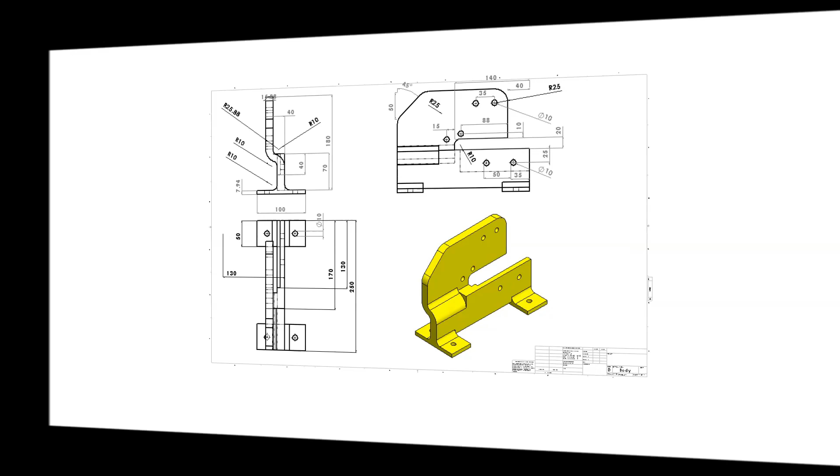Now we will sketch the first part of the guillotine shearing machine, manual shearing machine. Let's start. Choose front plane, sketch, select a line and start to draw from the origin point.

And connect. Now exit. Now we will assign dimension: 15.875, 70 mm distance from top, 180 mm, and the distance from here to this path, choose 40. Select OK. Now select this line.

Shift key, this line and this line, make relation equal. Now these 3 points are equal. Now our geometry is fully defined.

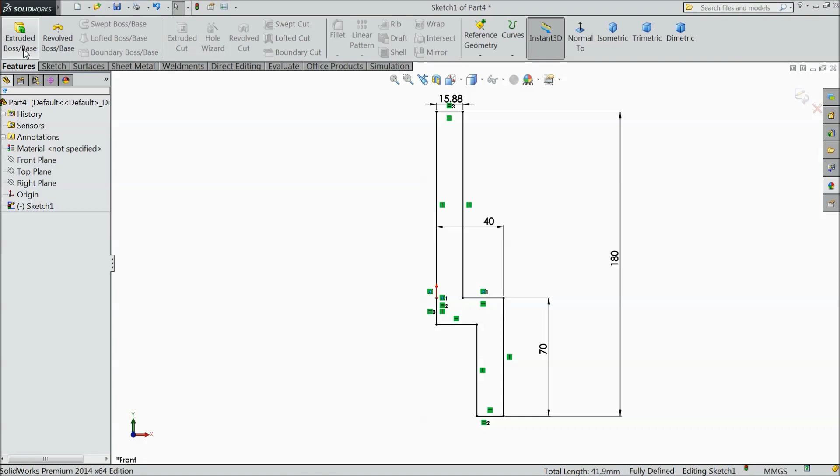Now we will extrude 250 mm. Select OK. Now see, the body is defined.

Now select this back surface, choose sketch. Exit. Select first normal. We want to define some... okay. Now let's select back surface, sketch, normal.

Select corner rectangle, exit, select 100 mm and this one select 7.9375.

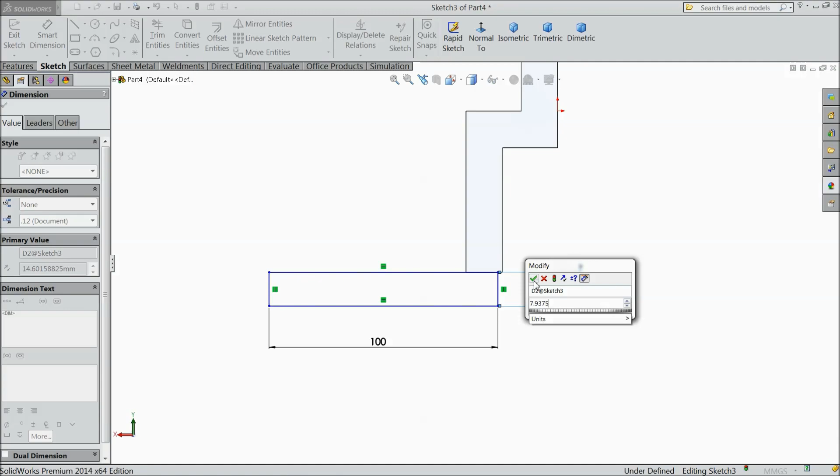Okay. Now select this line and select this line, make relation collinear. Okay. Now drag this here.

Now we want to make this parallel. So just delete this first. Assign one dimension from here to here. Choose smart dimension. Assign any one, 40, like this.

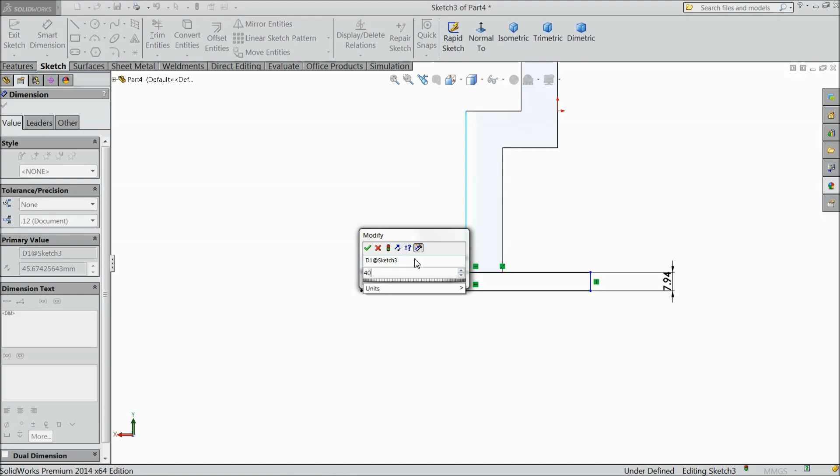Or cancel this line, make it from here to here, then up to here, then up to here. Now exit. Now choose, delete this line, make relation, this line select equal. Now assign 100.

Okay. Select extruded boss, keep reverse direction, 50 mm. Okay.

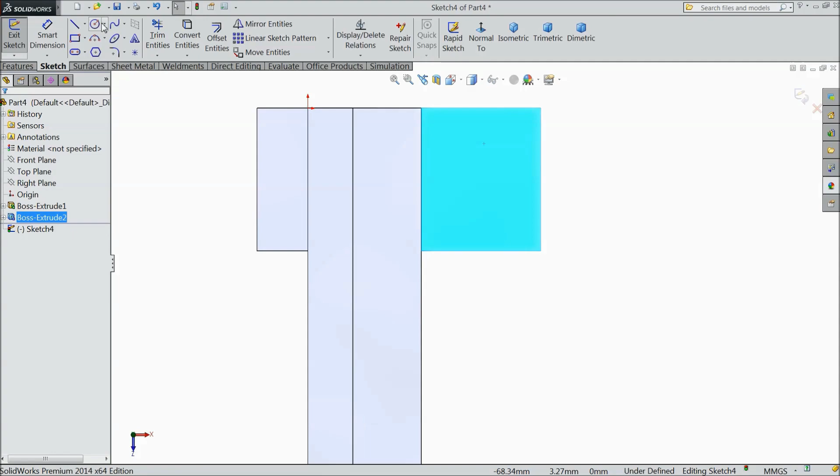Now select this face, sketch, normal, and we want to draw a circle. So first select center line, exit. Now select a circle in center, select 10 mm and select extruded cut, choose through all.

Okay. Now see. Now we want to mirror this hole. So first we have to create a plane in between this line. So just select plane. It will take a few seconds.

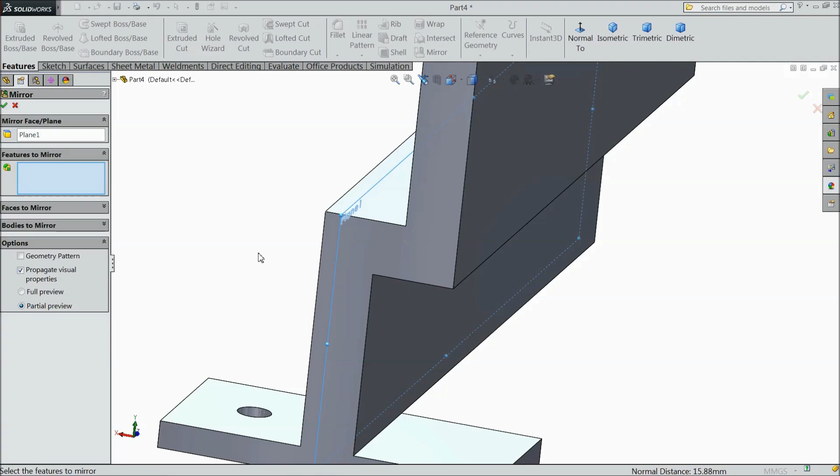Select this side and select this side. Now see, the plane is going to be created in the mid plane center. Choose OK. Select mirror. Select here cutout. See, it is going to mirror.

OK. Now choose fillet. Select 10 mm this side and this side. Choose OK. Now hide this plane.

Now we want to mirror this whole extruded part this side. So let's create a plane in between this. So choose mirror, plane, select this face and select this face. Now see the plane going to be created in mid size. Choose OK. Select mirror.

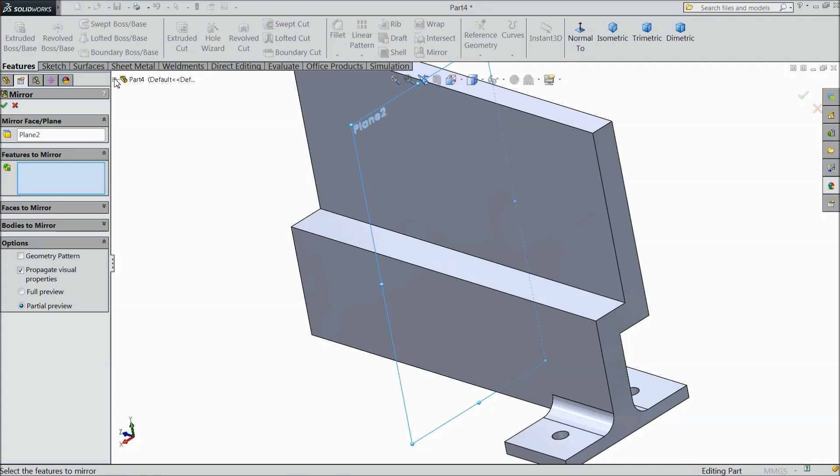Now select those parts we want to mirror: fillet, mirror, cutout, and extruded boss. These are all parts we want to mirror. Choose OK.

Hide this plane. Oh sorry, just hide this plane. OK. Now select this face, sketch normal.

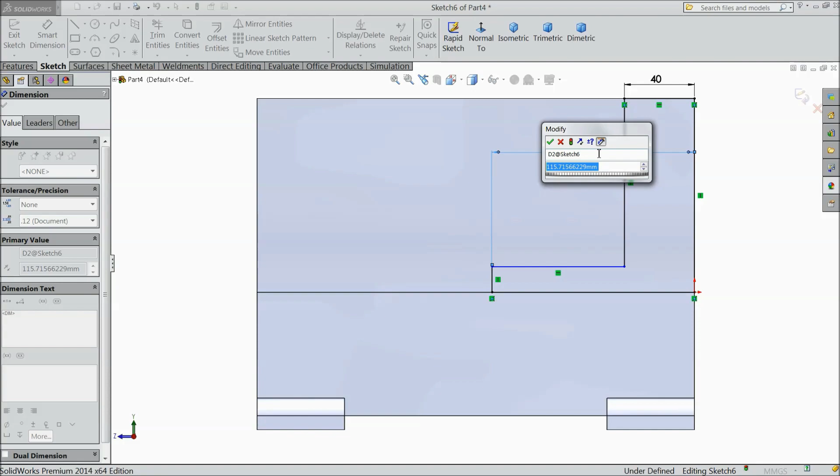Select a line. We want to cut it. Now exit from the line, choose smart dimension: 40 mm and length from here to end 140 mm, and this height 20 mm.

Select extruded cut. Now this portion we want to cut through all. Choose through all. OK.

Now select fillet, choose 25 mm and select this end. OK.

Select this face, sketch normal. Now select line, start from here to this end, up to this end, and connect it. Now exit from the line.

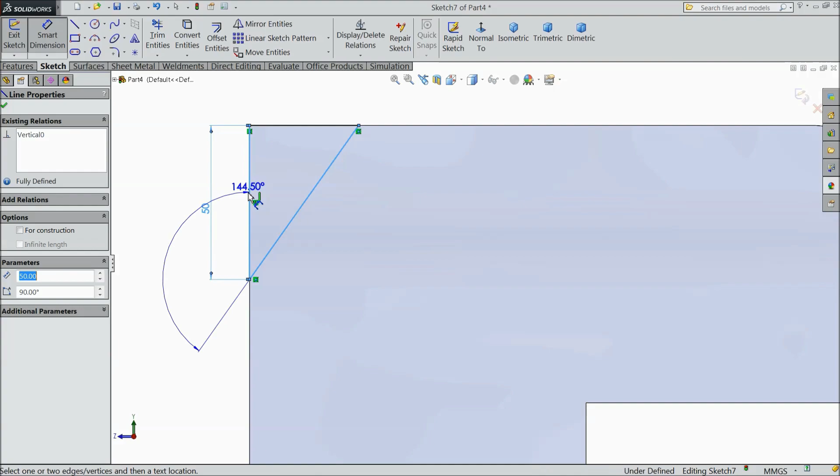Now define dimension, select 50 mm and make the degree 45. OK. Select extruded cut and keep through all. Choose OK.

Now select fillet, keep 25 mm and select both ends. OK.

Now select this face, sketch normal. Now draw a circle, 2 circles, 1 circle here and 1 circle just above this point. Now exit. Assign dimension.

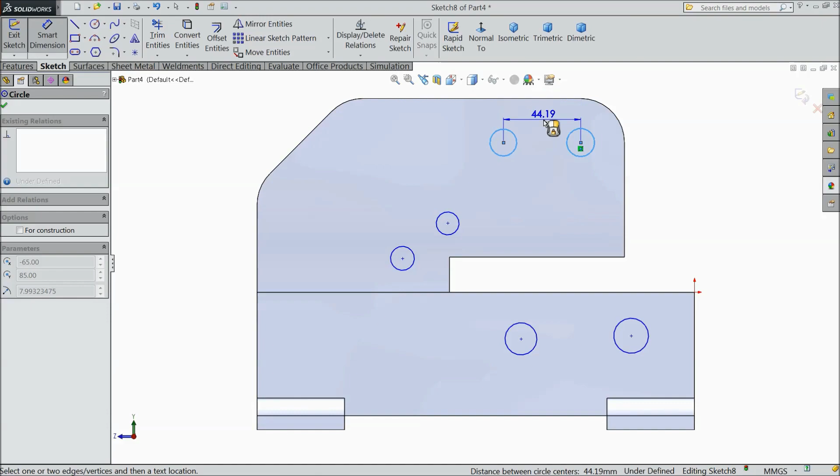Assign 35 mm, 88 mm, 15 mm, and the distance from this end 25 mm, and the circle assign 10 mm.

OK. Now select this circle and select one by one all circles. Now assign relation equal. Planes also selected, delete this plane. Now assign equal. Okay.

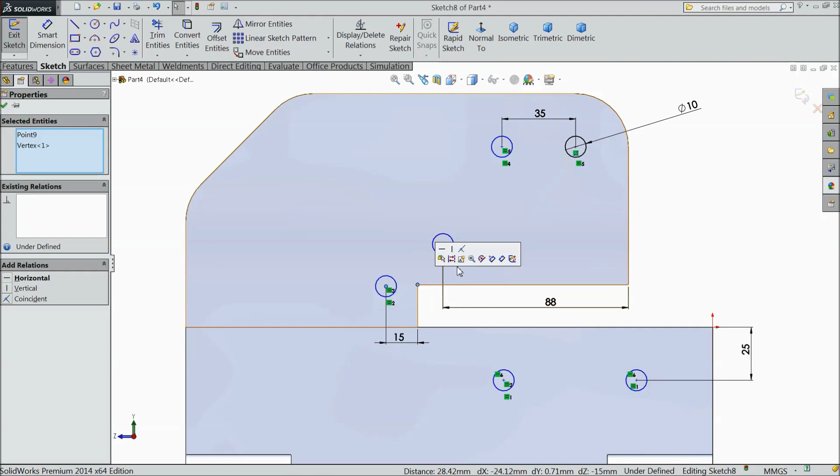Now make some relation, select this center point and this hole same position, this center point and this point same. Now distance from here to here assign 10 mm.

Now our geometry is almost fully defined. The distance between these two circles keep 50 mm. Select OK.

And the distance, select 35 mm. This also defined 10 mm, 88 mm this distance. Choose OK. Now all the distance we defined.

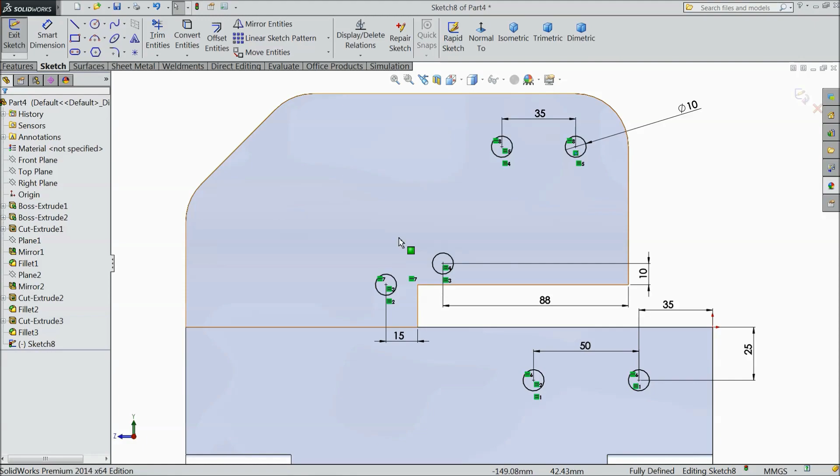Select this point and this circle point, make relation. OK. Now it is fully defined. Go to feature, select extruded cut. Choose through all.

Select OK. Now see the holes are created. Now select this face, sketch normal.

Choose a line, start from and connect. Now exit.

Now define the length. Select 40 mm. Okay, now we want to extrude cut. See this portion we want to cut up to 170 mm inside. Choose OK.

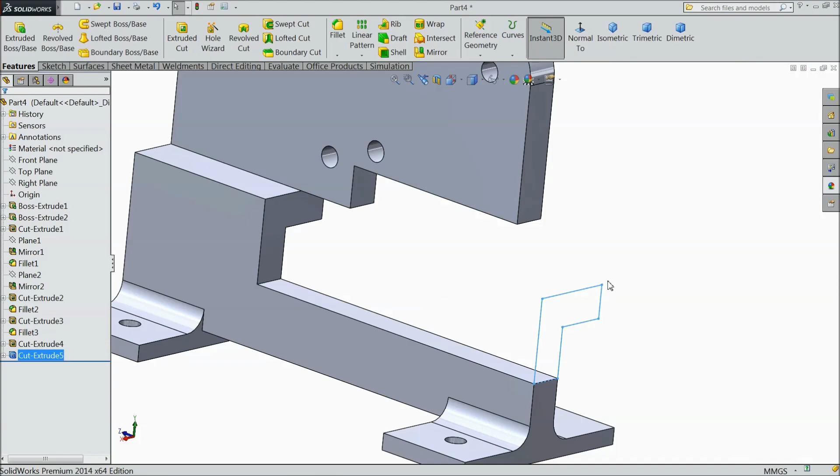OK. Now see this portion is almost prepared. Now choose fillet, select 10 mm and select this inside. OK.

Now again choose fillet, select 25 mm this end. OK. Again fillet 10 mm and this end. OK. Now select this face, sketch.

Select a line from this end to this end, up to inside, up to here and up to here. Now exit.

Select extruded boss, keep here up to vertex and select this as a vertex. OK.

Now select this face, sketch. Select corner rectangle, select this end too. Or cancel, again choose corner rectangle, select this end to this end.

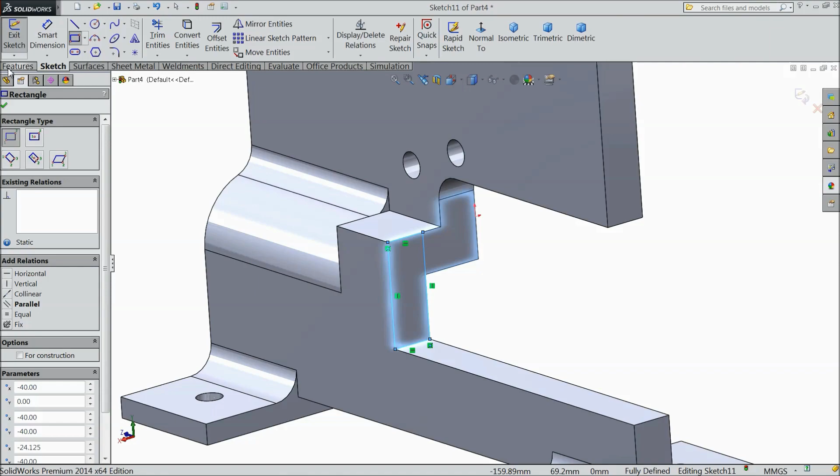Select extruded boss and choose up to vertex and select this point as a vertex. Choose OK.

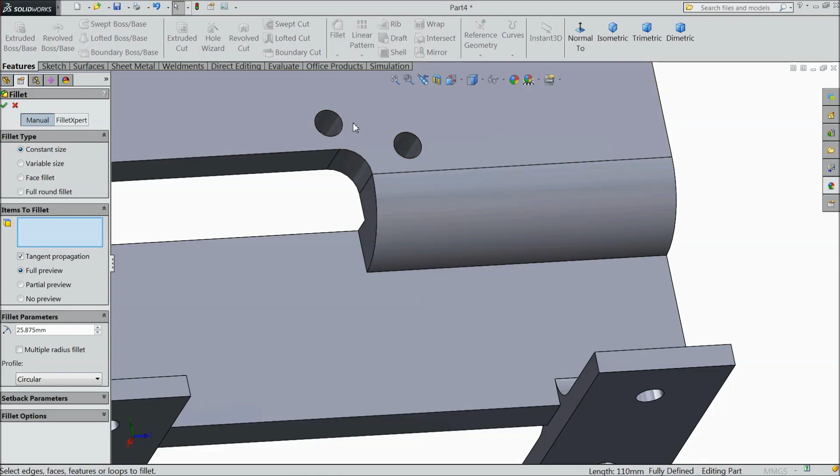Now again choose 10 mm. Select OK. This fillet also keep 25.875. Okay.

Now select this face, sketch, choose corner rectangle, and we want to cut a rectangle, so draw a rectangle and assign the length 40 mm.

Okay, select extruded cut, and we want to cut up to 130. Okay, now select this face, sketch, normal,

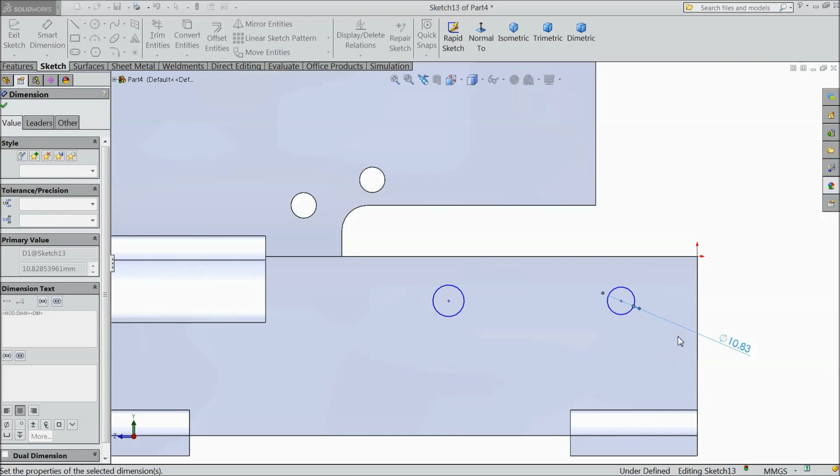Select center point of both circle, make relation horizontal. OK. Select extruded cut and choose through all. Okay. Now, so this is our first part is ready.

This is the first part of our manual shearing machine or guillotine machine. Save in our file, shearing machine. Body.

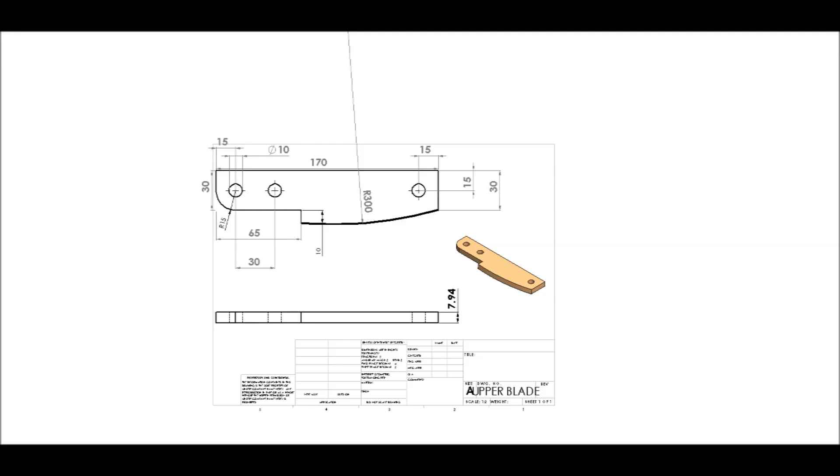Now we will sketch second part of manual guillotine machine, shearing machine. This is upper blade. So let's start. Choose top plane, sketch. Select a line and draw from here, now exit. Now assign dimension.

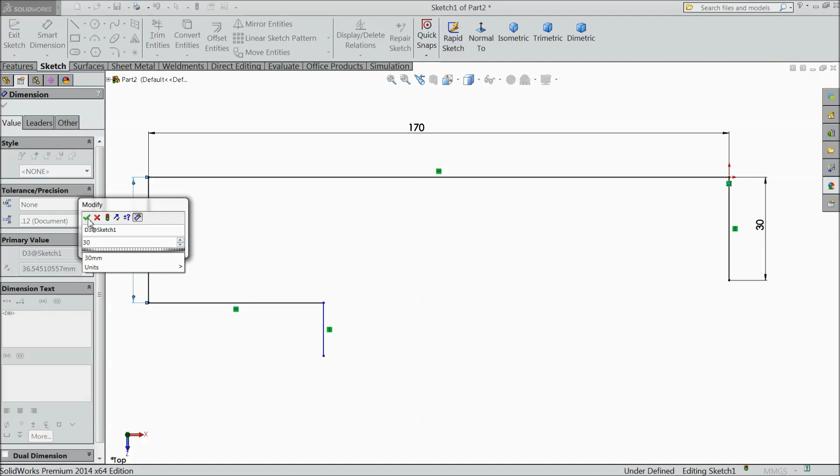So select upper dimension, 170 mm, 30 mm, 30 mm, 65 mm, and this length

10 mm. Okay. Now select 3-point arc. Connect this end to this end. Select OK.

Choose smart dimension and assign radius 300 mm.

Okay. Now select this, move this point. Oh, sorry, delete this. We want to connect from here. 3-point arc.

Okay. Now assign diameter, radius 300 mm. Select OK. Now choose fillet 15 mm. Select this corner. Choose OK.

Now select circle. Draw 3 circles here. OK.

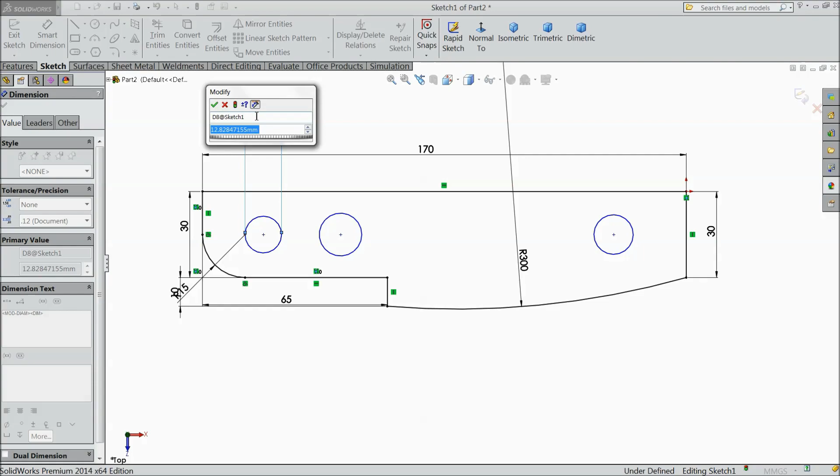Now assign diameter 10 mm. OK. Now select all the circles and make relation equal.

Now see, all the circles are equal. Now select all the circle center point and define in horizontal position.

Now assign dimension 15 mm, 30 mm, and this one 15 mm, and the distance from here to this wall 15 mm. Okay. So now all in center direction.

Now select extruded boss. We want to extrude up to 9.375 mm. Sorry, 7.9375 mm. This is our requirement.

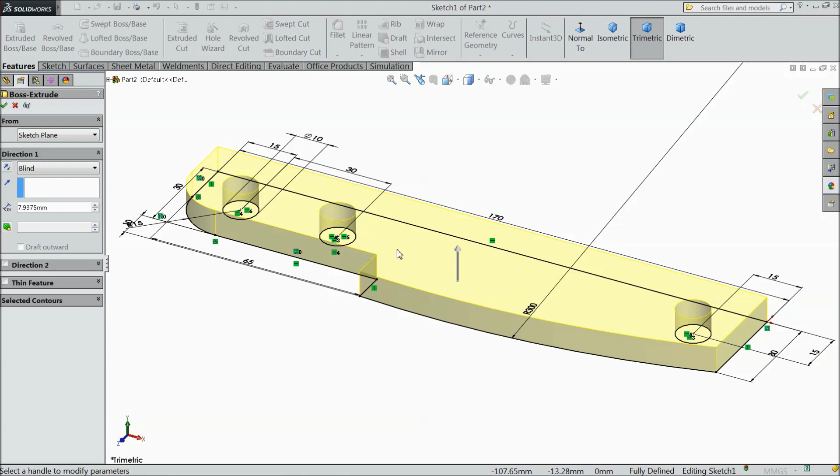Okay. Now choose chamfer. Select this face. Clear. Select only this face. Choose 5 degree

and keep 7.9375 mm. Select OK.

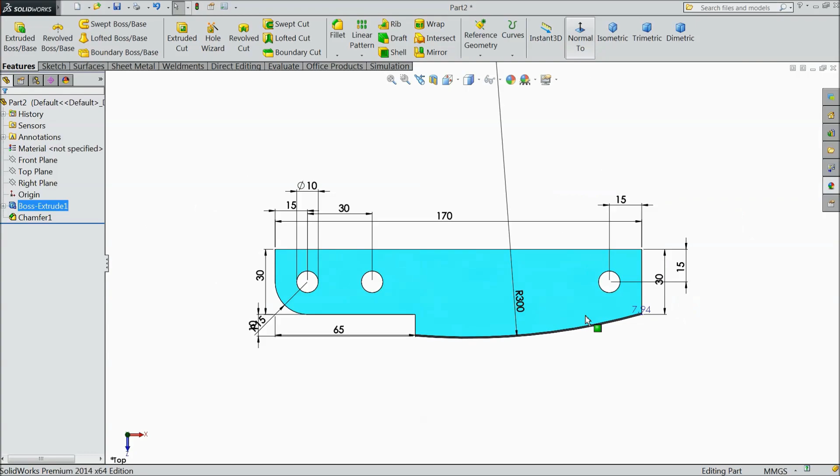Now select this face, choose normal. See, it's looking. So just save as, create new folder in desktop, save as upper blade.

Now assign satin finish stainless steel color, save as. Okay.

Now we will make third part, lower blade. So let's start. Choose top plane, sketch, select center rectangle. Okay.

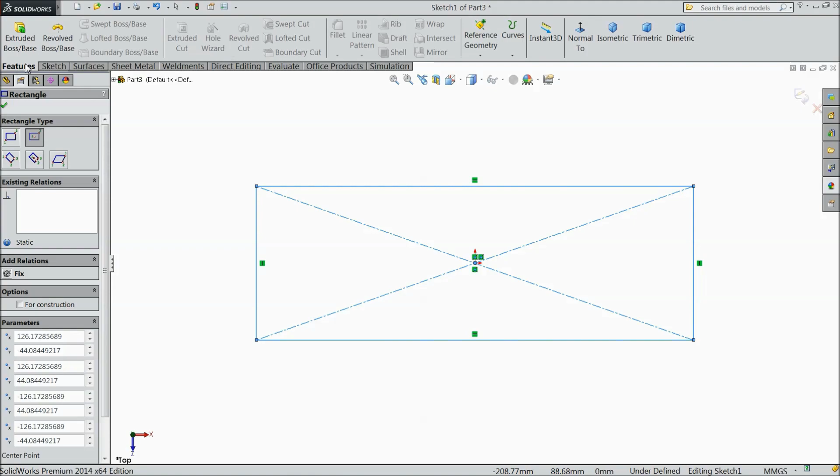Now assign dimension, keep length 120 and the height 45 mm.

Okay. Now select circle and draw 2 circles here. Keep the diameter 10 mm.

Distance from the one end keep 35 mm, the same as for second circle, and the distance from bottom keep 15 mm. Okay.

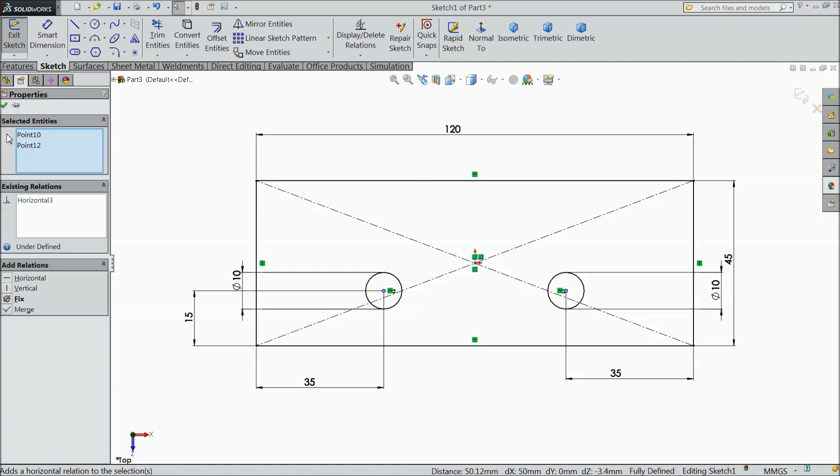Now select the center and the center of second hole, make horizontal position. Okay. Now select extruded boss, 7.9375 mm. Okay.

Choose perspective, select chamfer, select this end. This end we want to chamfer 5 degree, 7.9375. Okay.

Now assign the material satin finish stainless steel and choose the color, previous color, little orange. Now save as lower blade.

Okay. Now select from origin point, draw a vertical, go back, select OK. Now just drag it and make one slot, exit, choose center line, connect one end to this end and another end. Now exit. This is, make sure this is vertical.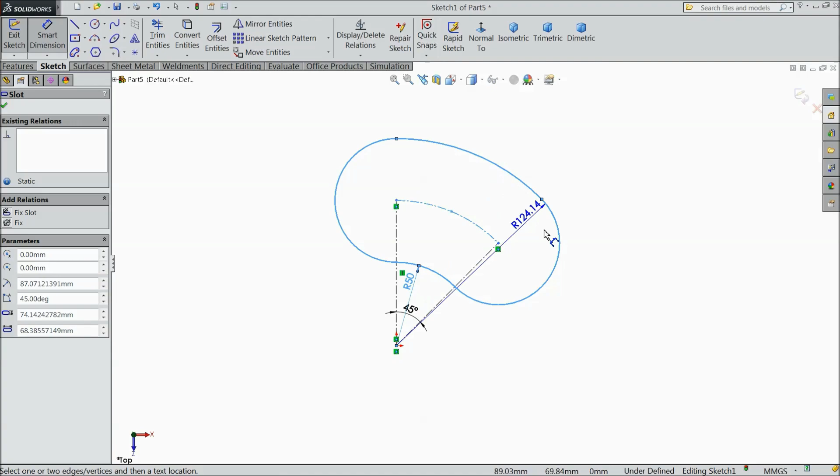Now assign this angle, keep 45 degree. Inside radius make sure 50 mm, and the outer one 80 mm.

Now choose circle and draw two circles in both the ends.

Assign 10 mm. Now select this circle and this circle, make relation equal. Select OK. Now our geometry is fully defined. Select extruded boss.

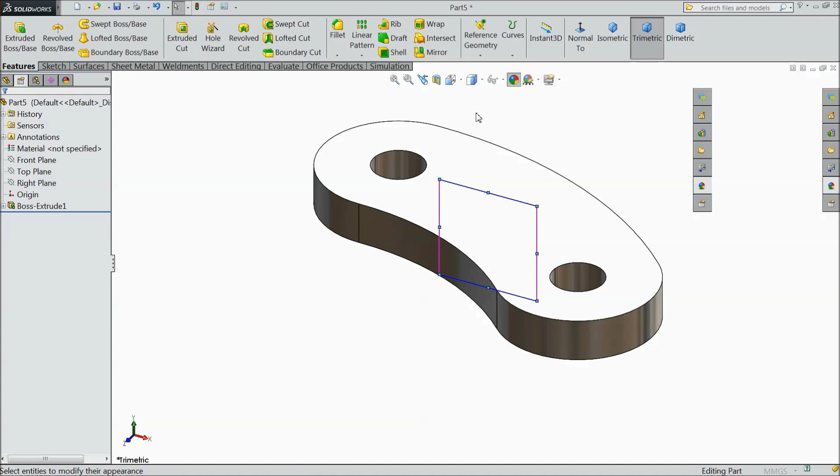Now assign satin finish stainless steel, and this time we will assign a different color. Let's assign blue color. Save. Now save this part, support.

Now move for next part. Now sketch part number 5, manual handle support. Choose top plane, sketch.

Select a center line, edit, assign the length 100 mm. Choose offset entities, select this circle, select 50 mm, make 25 mm.

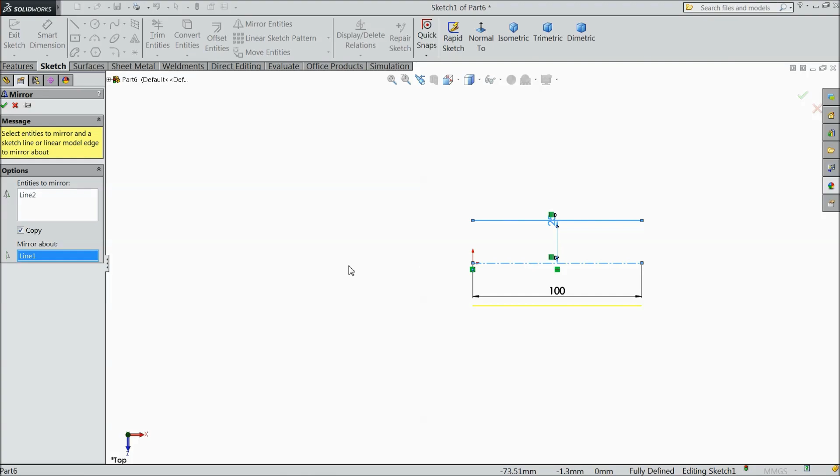Now mirror about, select this line, mirror about this line, select OK. Now make sure this point and this point are in one position.

Select center line and draw one line, exit. Now assign length 45 mm and the angle 135 degrees.

Now assign, select circle and draw 3 circles. Exit. Select all 3 circles and make one relation equal. Now assign diameter 10 mm. Now all circles become 10 mm.

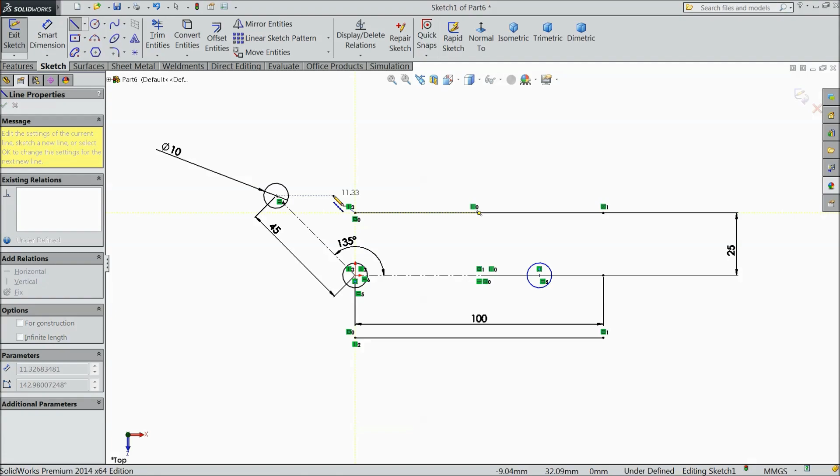Choose a line. Again choose circle and draw one circle. Keep diameter 36 mm.

OK. Now select a line and draw 2 lines from exit. Again choose line.

Now select this line and circle, define tangent. The same as here, this line and circle, define tangent. So now this relation is developed.

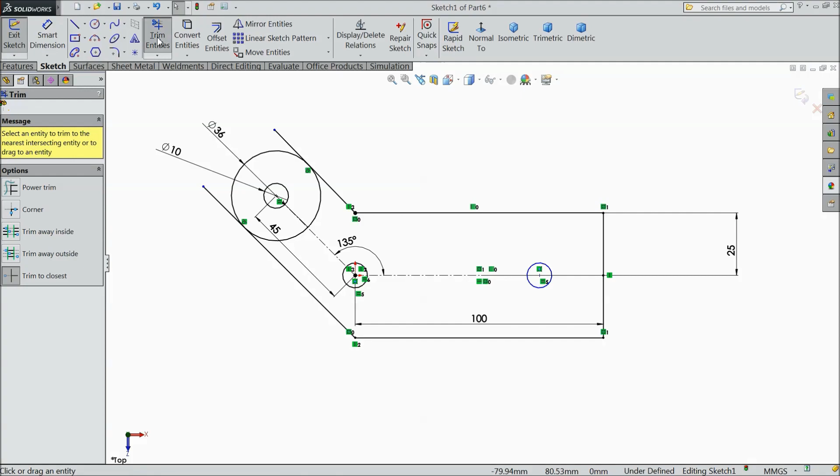OK. Choose line and connect one end to another end. Exit from the line. Choose trim entities, trim outside and inside line also.

OK. Now define this circle's distance from edge. Select 17 mm. OK. Now this geometry is fully defined.

So select extruded boss. Keep 8 mm. Select OK. Now select this face, back face, sketch normal. Now select line and start from one end.

Connect here. Now exit from the line. Select this line, upper line, and this lower line, make relation equal. Now assign this length 36 mm and distance from

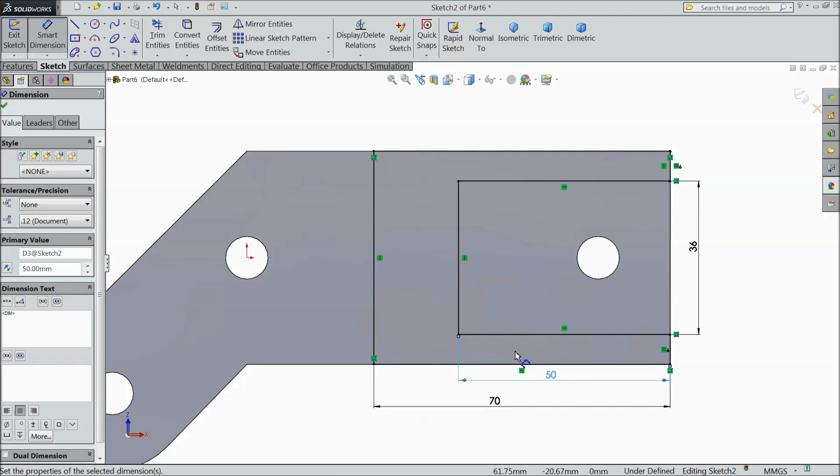Select extruded boss. Now select this face, keep 8 mm, select OK. Now see, now choose fillet 15 mm and select this edge and this edge, select OK.

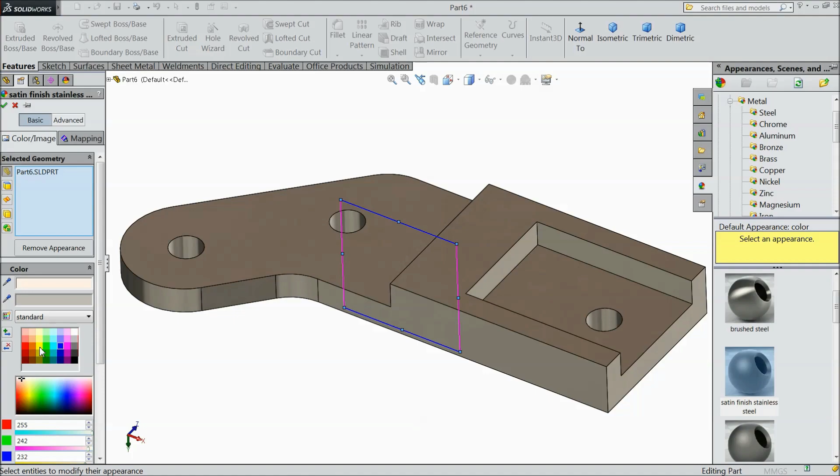Now assign material is satin finish stainless steel and assign the color. OK. Make little. Select OK. Now save as handle support.

Now move for next part. Now part number 6, handle. So select top plane, sketch.

Select corner rectangle and draw from one end. Now assign length 300 mm and the width 34.925 mm. OK.

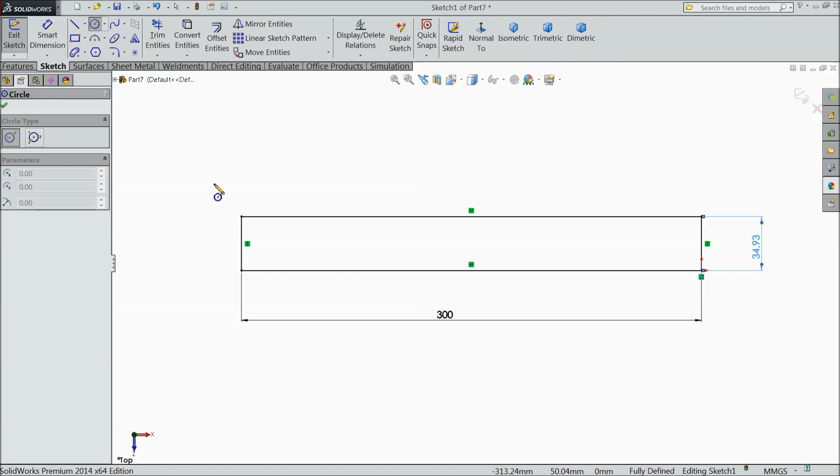Now assign circle, 10 mm.

Select center line, connect from this midpoint. Now exit. Select this line and click relation horizontal. Now it is horizontal. Now assign distance 17 mm.

OK. Now select extruded boss. We want to extrude all up to 9.525. Select OK.

Always keep perspective and assign polished steel. Better.

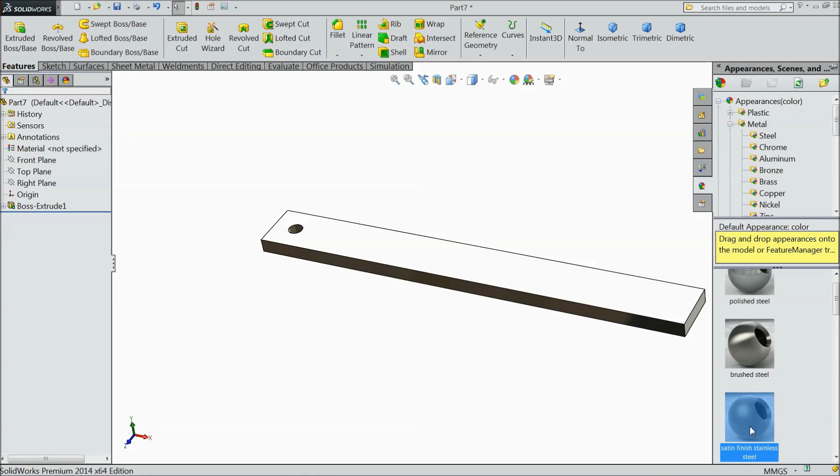Now save as handle. Assign those red color. Okay, let's move for.

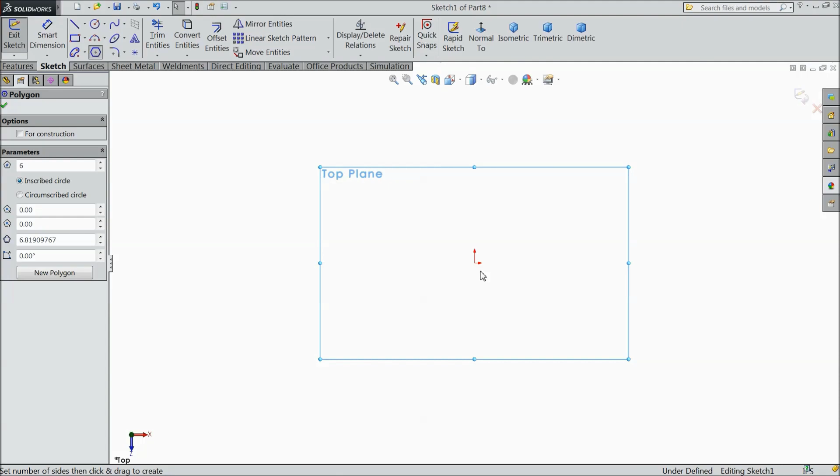Let's make the nut, bolt and washer for the guillotine machine. So first we will make it in inches. So change unit here to inches. Choose top plane, sketch, select hexagon and draw one hexagon.

Now select this point and origin point in vertical relation. Now define 0.563.

Select extruded boss, 0.25 inch.

Okay. Now select back surface, sketch, draw a circle here and assign diameter 3 by 8 inch.

Okay, select extruded boss, 0.8 inch. Select OK.

Now we will assign some cosmetic thread. Annotation cosmetic thread. We will assign not a real thread but a cosmetic thread. Just wait a few seconds. Now it appears.

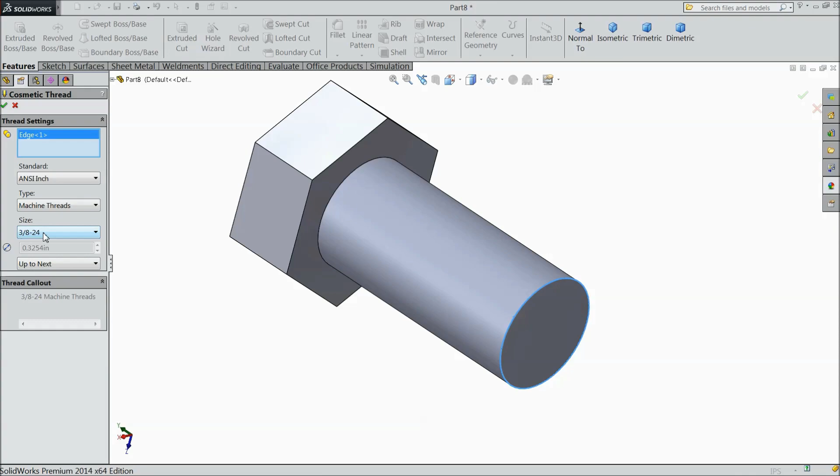Just select edge. Here select ANSI inch machine thread and choose 3 by 8 24. OK, and up to next select OK.

Now go to options, document, detailing and click shaded cosmetic threads. OK, now see the threads are looking good.

Now select this face, sketch, draw a circle here up to tangent of this face. Now select extruded boss, cancel, extruded cut.

Select flip side and keep angle 45 degrees. See, select OK. Now see the edges are created.

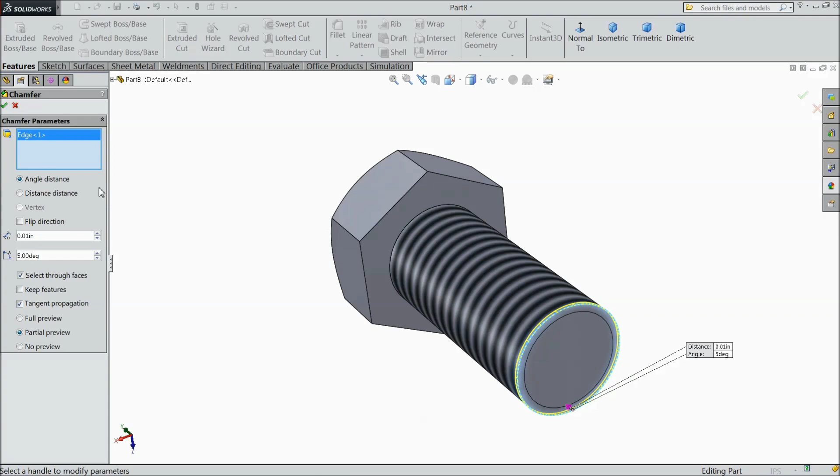Select chamfer, 0.01 and select the edge. OK. Now our bolt is ready.

So save it as bolt 3 by 8 inch. OK. File name is telling not a - you can directly say bolt. Now create new part.

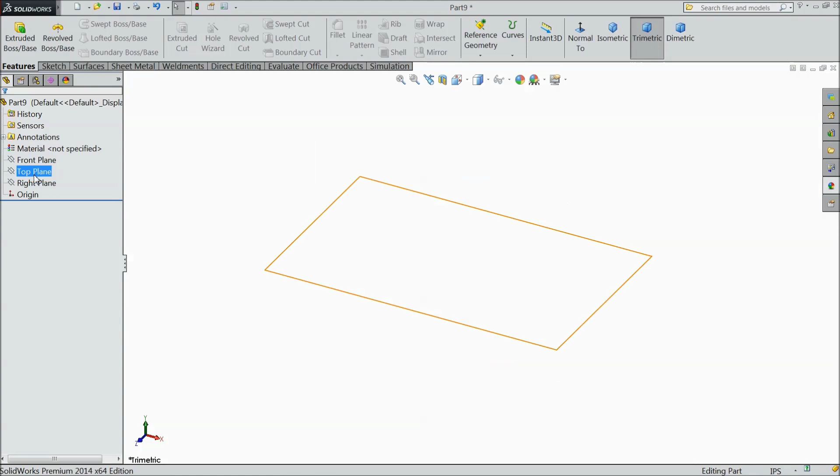Now we will create inch nut. Choose unit inch, background plain white. Now select top plane sketch, draw a polygon, exit, select top point and origin point vertical. Now assign distance.

0.563 inch. Select extruded boss and keep 0.25 inch.

OK. Now select top surface sketch, select circle and draw one circle here. Keep the diameter 3 by 8 inch. OK, select extruded cut, choose we want to select extruded cut, select through all.

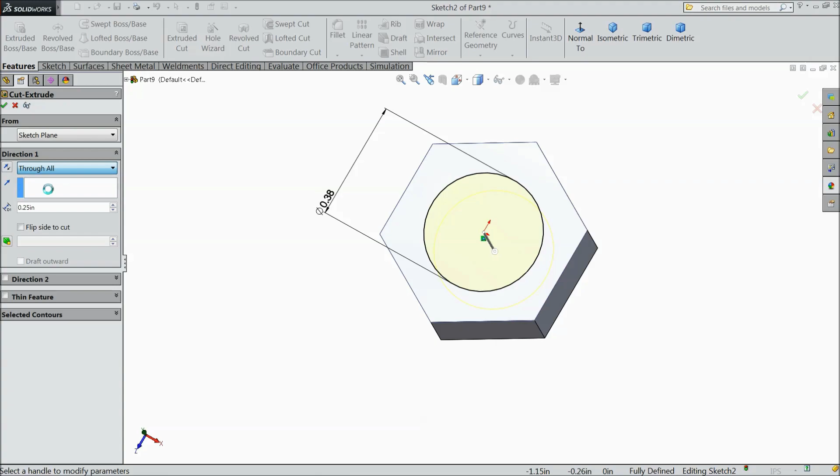OK. See, now we will assign some color, cosmetic thread, annotation cosmetic thread. Select one edge, ANSI machine thread. OK, any thread you can select here. Up to next, choose OK.

Now the same as here, go to option detailing shaded cosmetic thread. OK. Now see the threads are looking inside.

Now choose chamfer 0.01 inch and select both the end. OK. Now select this face.

Sketch, draw a circle up to tangent, select extruded cut, choose flip side, keep degree 45. OK. Now the same as back side.

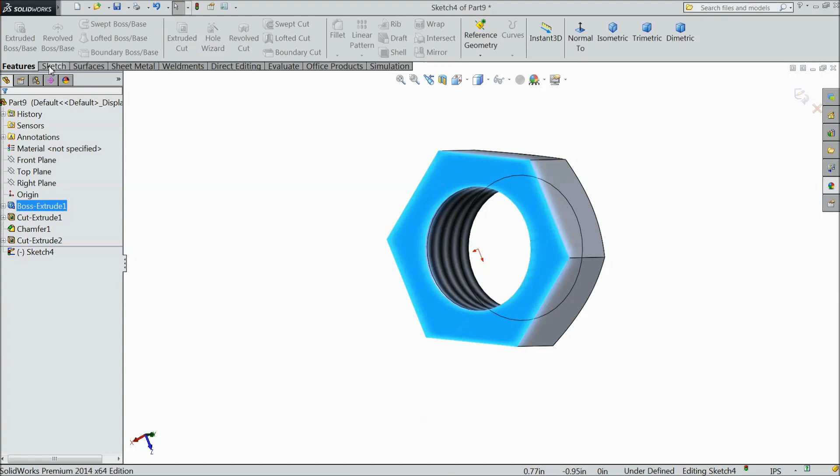Repeat the procedure. Flip side 45 degree. Okay, now our nut is ready. This is our nut.

Assign some color, satin finish, save as a nut.

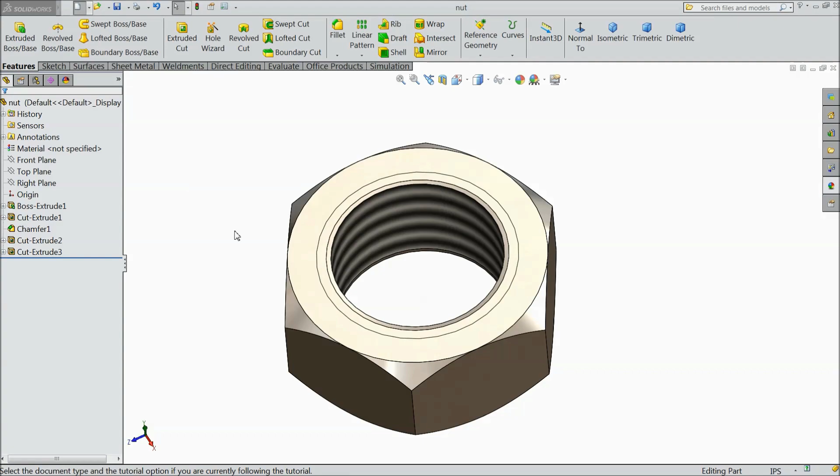Now make washer, so choose new part. Washer we will make in mm, no need inches. Select top plane, sketch, draw 2 circles, ten mm, 20 mm.

Okay, select extruded boss, keep 1 mm thickness. Okay, now assign material satin finish stainless steel, white background. So this is our washer. Just save as washer.

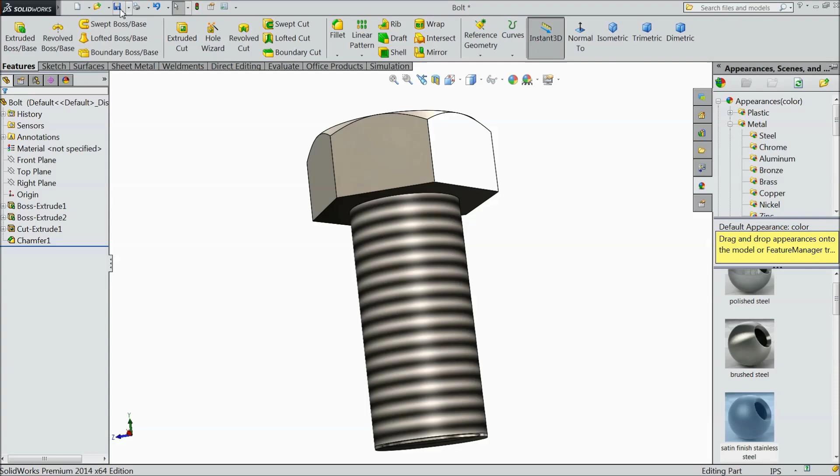This is the bolt. Just save bolt, satin finish stainless steel bolt. Save. Now let's move for next part.

Now the last part we are making, so let's start. Choose top plane, sketch, select here straight slot and draw a slot from origin point. Okay, now again draw a same slot but little bigger.

Now assign length 15 mm, this radius keep 5 mm and this one keep 10 mm.

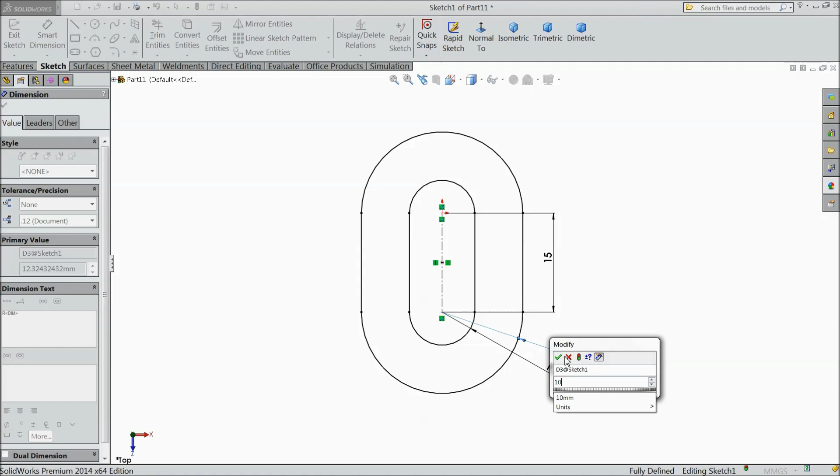Select line and draw a vertical line, exit. Now define the length 72 mm. Okay, choose offset entity, select 5 mm, choose bidirectional, select OK, choose trim entity and trim inside portions.

Now choose trim entities because we want to draw some parts from here. Okay, now select the center line as a construction line.

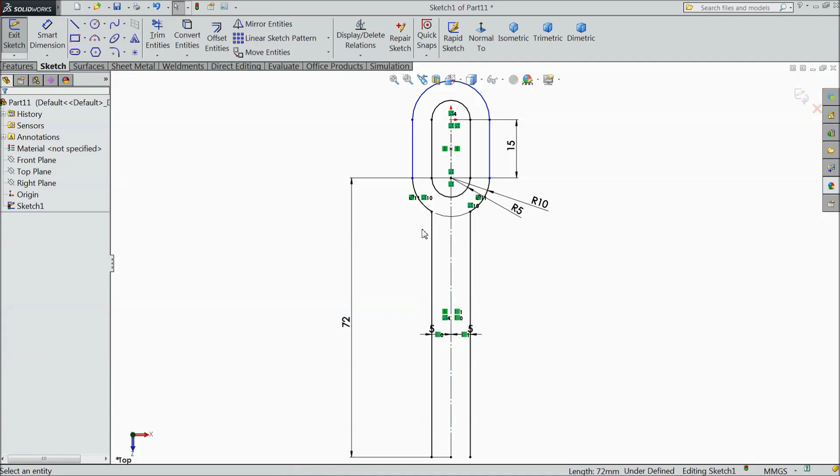Now choose corner rectangle, draw a rectangle, assign the length from here to this point, choose 15 mm, the overall length 80 mm and the height 5 mm. Okay, trim entities, trim inside portions.

Okay, now select extruded boss, choose this one and this one, select 12 mm, select OK. Now this handle's almost ready. Now go for next process.

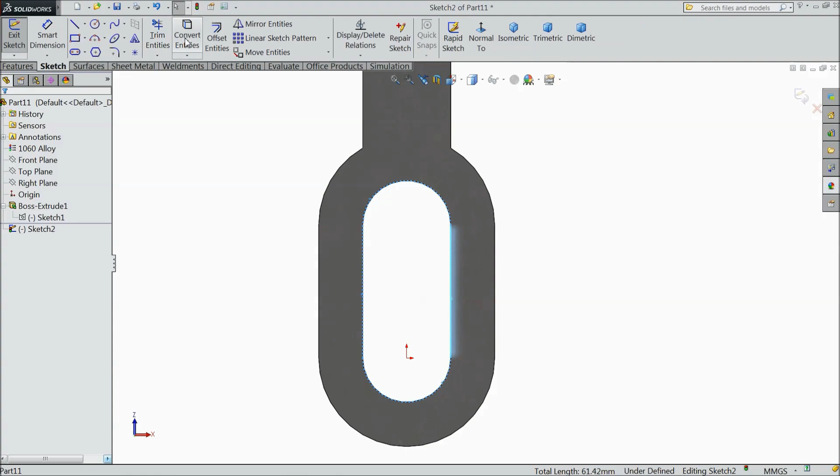Now select the back surface, sketch normal. Now select this internal line and click here convert entities. Now we want to convert this line, so now it is converted.

Choose straight slot, draw a slot from this point to this point and select up to, assign radius 10 mm, it's level to this. Okay, select extruded boss. Now we want to extrude up to 8 mm, select OK.

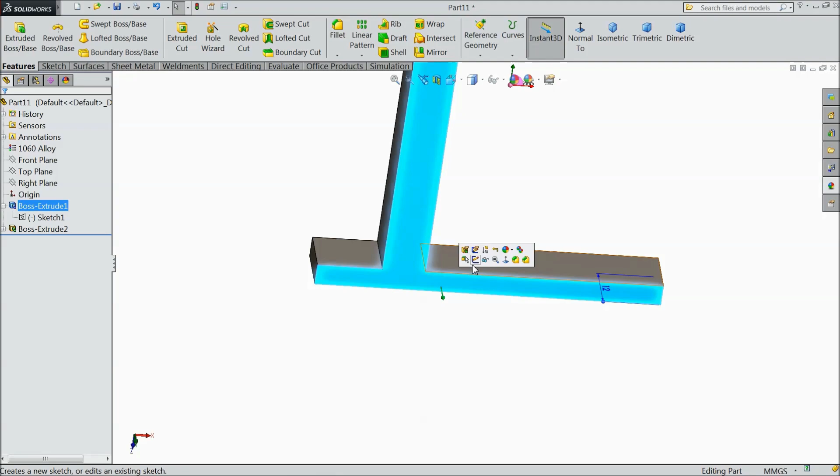Now it is extruded. Now select this front face, sketch, normal. Now we want to extrude this also, so choose corner rectangle, draw one rectangle from one end to another end. OK. Now choose extruded boss. This one we want to extrude up to 3 mm only. Select OK.

Now choose plane. We want to create a plane. Select back surface and select this back surface. Now the plane will be developed in mid size. See mid plane, choose OK. Now select this plane, sketch, normal.

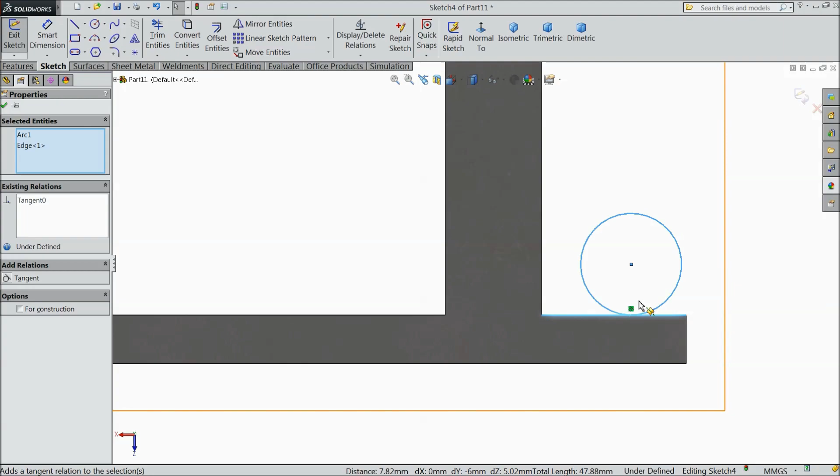Now we will create some geometry here. Select circle, draw a circle. OK. Now select this circle and this line make relation tangent. The same as this line and this line make relation tangent. OK. Select trim entities.

Just reverse back. Select this. Okay, this trimmed. Why it is not? It is selecting full. Maybe choose center rectangle.

Draw. Exit. Now choose trim entities. Now it is deleted. Choose smart dimension and assign the radius 15 mm.

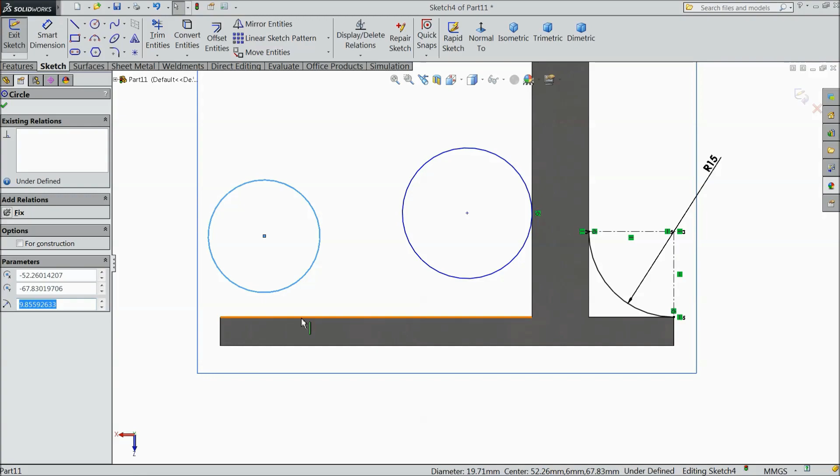OK. Now choose circle and draw here 2 circles. Now exit from the circle. Select this circle and this line make relation tangent. Select this line and this line tangent.

Now assign diameter 30 mm and this also 30 mm. And the distance from here to this point keep 19 mm. Select OK.

Now just choose line, select this line and this point up to this point and this point. Now exit. You can draw according to your requirement.

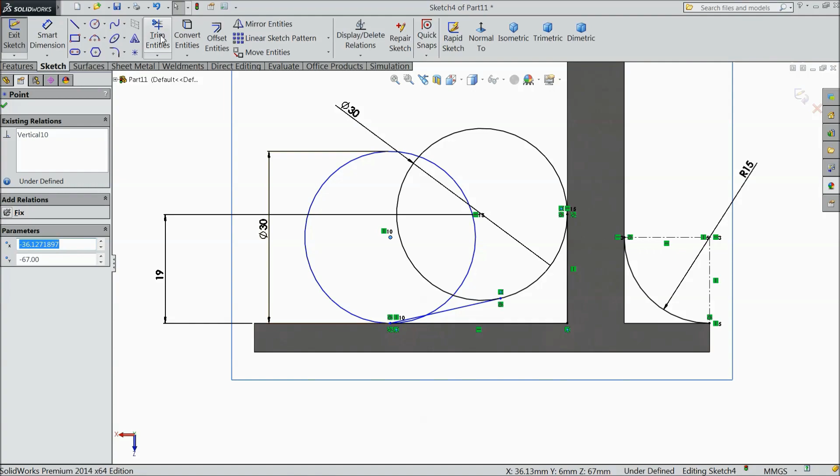Choose trim entities, select outer surfaces. Now go to feature, select extruded boss, select this section and this section.

Cancel it, choose line and connect it from here to this point and up to this point. Now exit from the line. Now connect extruded boss, both selected. We want to extrude both sides, so choose mid plane and make thickness 4 mm. So now this stand is ready.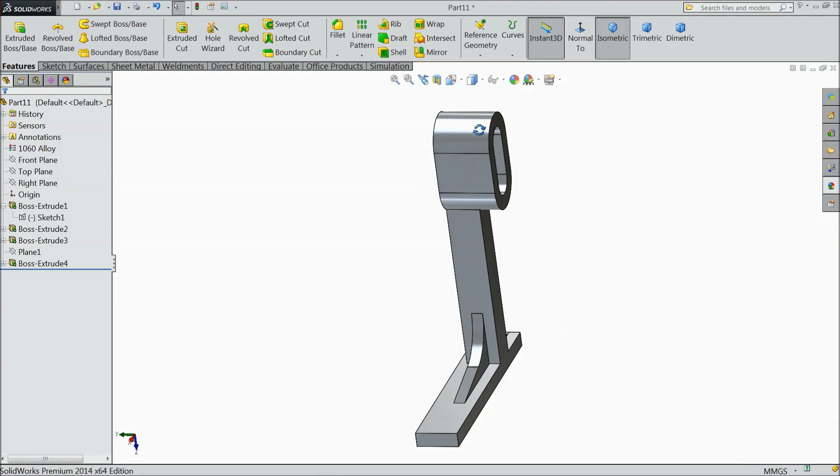Hide this plane. So this is the stand for our guillotine shearing machine or manual shearing machine. Just save it. We will save as a stand.

Now we will start the assembly of first bolt and washer. So choose new assembly. Now browse shearing machine, select parts. Now choose bolt and press Ctrl washer, open bolt and washer.

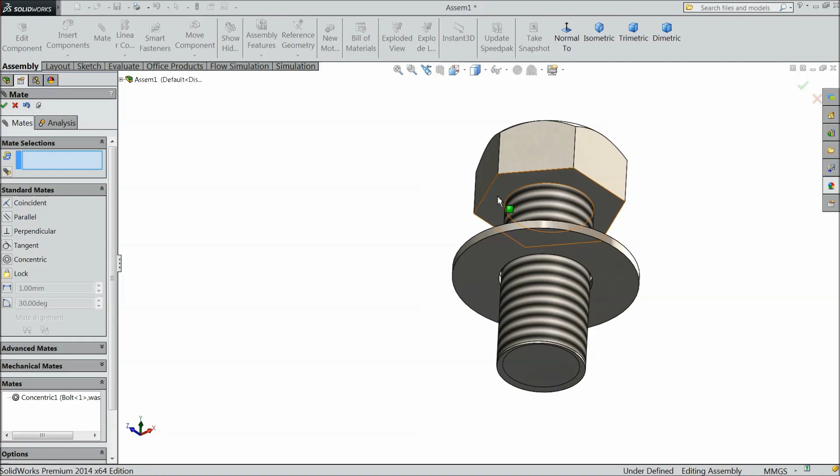Change the background. Now choose mate, select this and select inside, concentric. Select back surface and this surface. Now save this assembly 1.

Now open assembly 2. Browse the part. First choose open body. Insert component. Now choose upper blade. Now we will first fix upper blade. Rotate component.

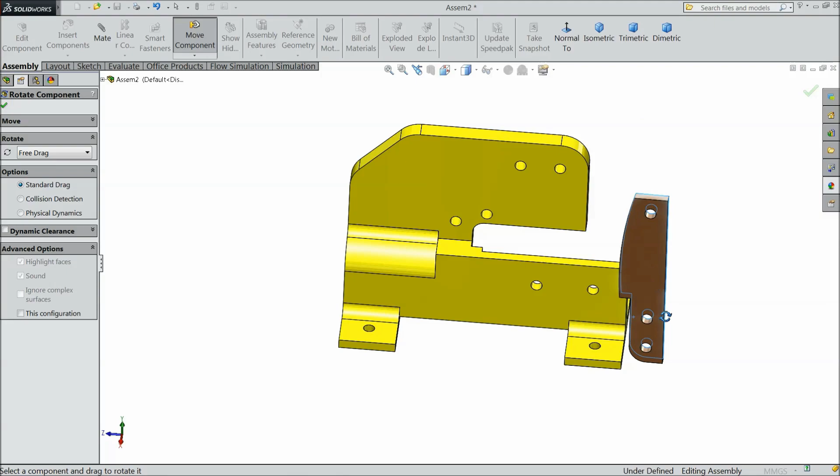Choose mate, select this face and this face, coincident. Select this inside circle and this circle. Now see it is moving. Now insert another component, lower blade.

Now bring this here, just rotate this. Now choose mate, select this face and this face. Choose mate, now select this down face and this face. Choose this circle and this circle. Now it is fixed here.

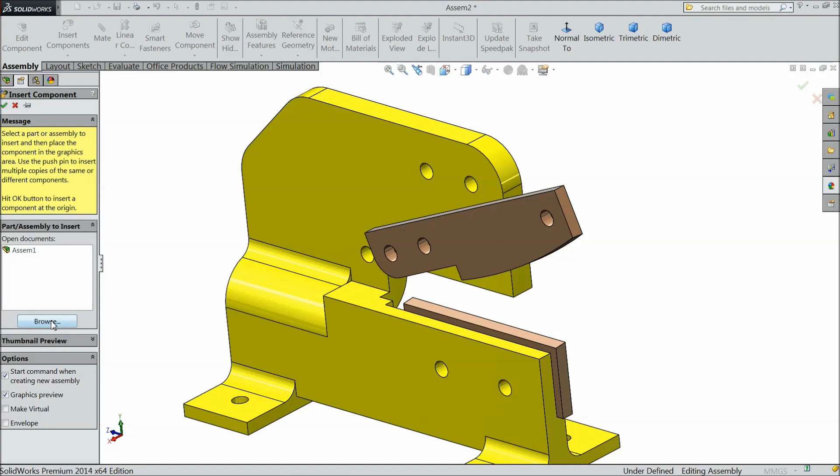See, now insert next component, now we will browse support, open. Now just rotate this component also, we want like this. Select OK.

Select mate, choose this face and this face. Now select this inside circle and this circle. Now see it is rotating.

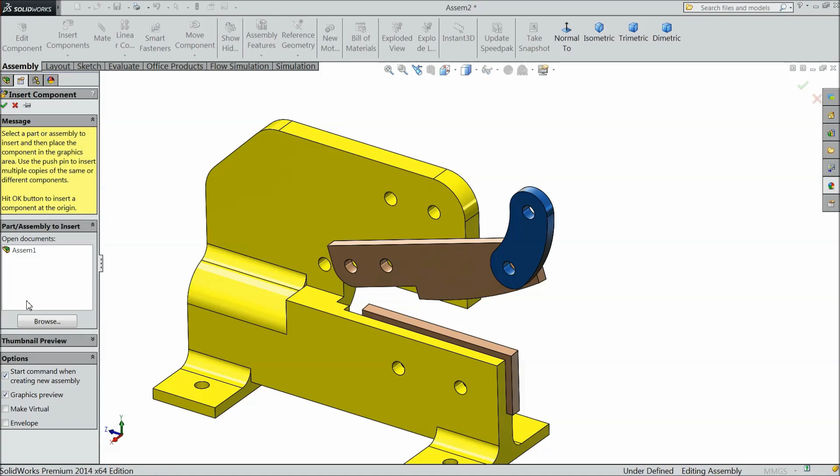Now insert next component, handle support. First rotate this component also. Choose mate, select first this face and this face. Select OK.

Now select this inside circle and this circle. Choose OK, now drag it up. Now we will fix these circles, select this circle and this circle, choose concentric. OK.

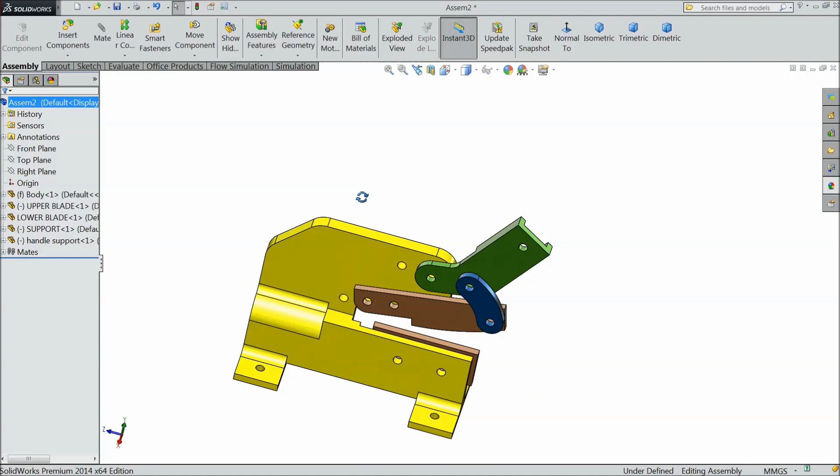Now see, it is rotating like this. This is our way of shearing. See.

Now we will browse next part. Let's choose handle. Now rotate this handle. Choose mate, select this face and select this face. Now choose this circle and this circle, concentric.

Now see, we want to make some more relation. Select this face and this face, parallel. Now we will rotate. Now it's rotating.

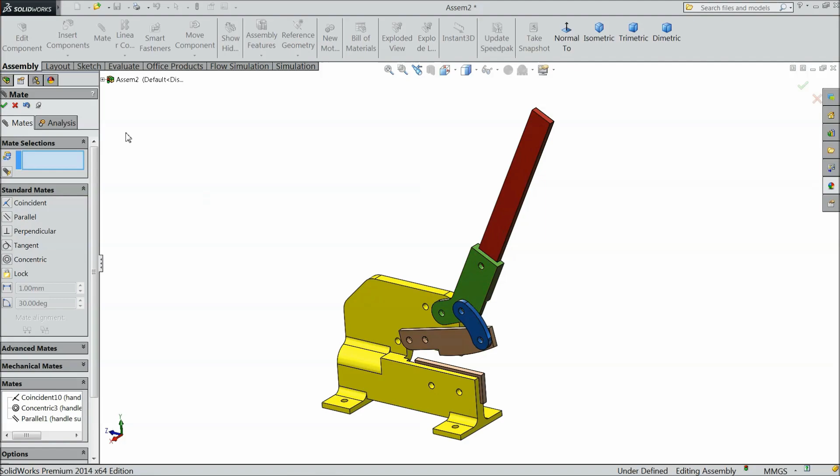Now insert another component, we will choose this stand. Now first we will assemble nuts and bolts. Browse our previous assembly nuts and bolts. Choose mate, select this circle and this bolt. Select the back of washer, select this face.

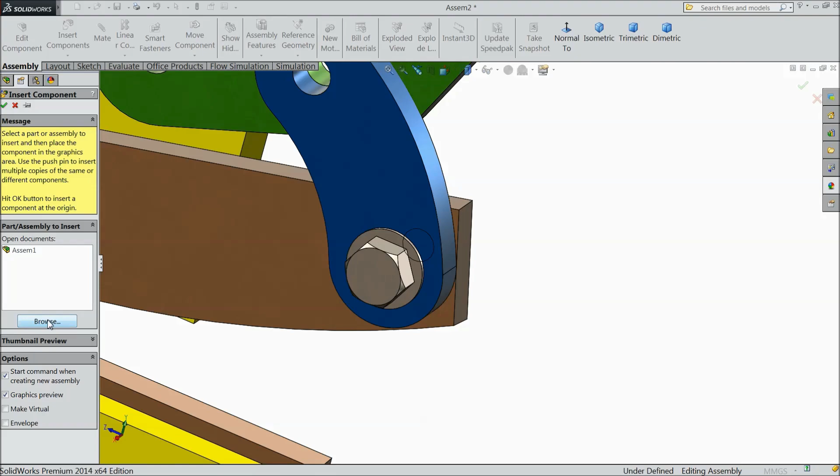Now insert component and browse the nut. This nut we made in our previous lecture. Choose mate, select this face and nut one side face. Select inside of nut and bolt nut. Now in same way we have to fix all nut and bolt in all the things, so I will skip this method, you have to do it manually, please do it.

Now see, as per our request, we fixed all the bolts and nuts backside. It is moving. This is our shearing, manual shearing or guillotine shearing machine. I hope you enjoyed. Now this one part is balanced to fix.

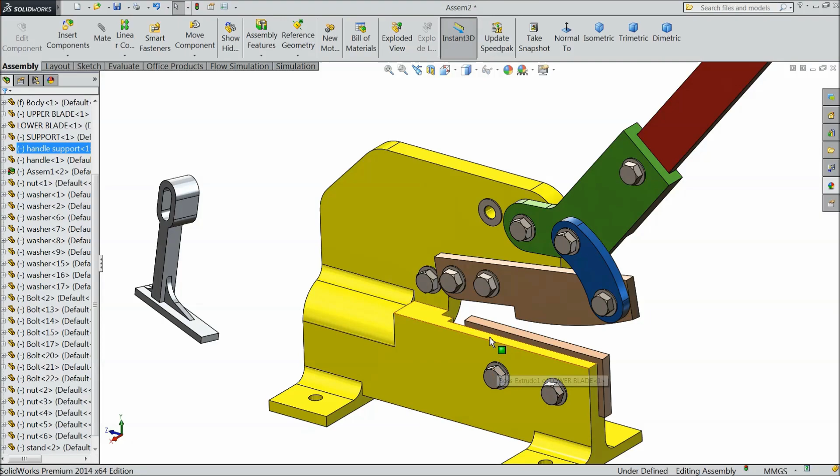Just rotate this part, choose OK. Select this face, mate, this face, select parallel. Now select this face and this face. Now select this circle and this circle, choose concentric.

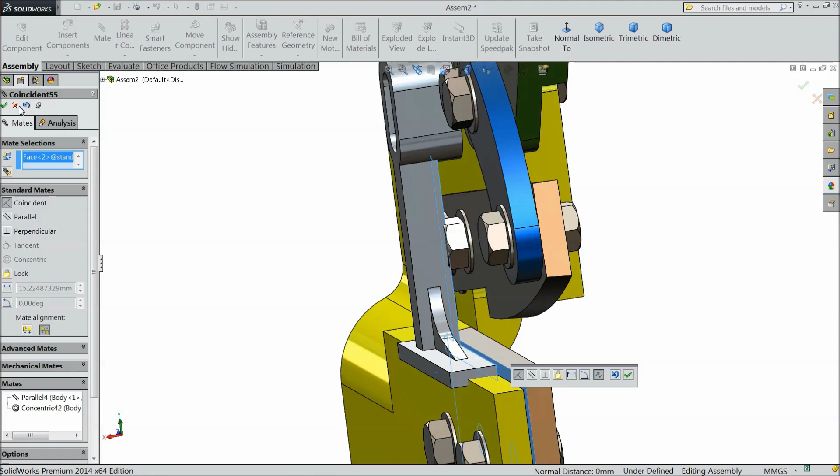Delete this relation. Now it is concentric with this. Now select this face and this face. Cancel it. Last mate is not perfect. Delete this mate. Now it is moving up and down.

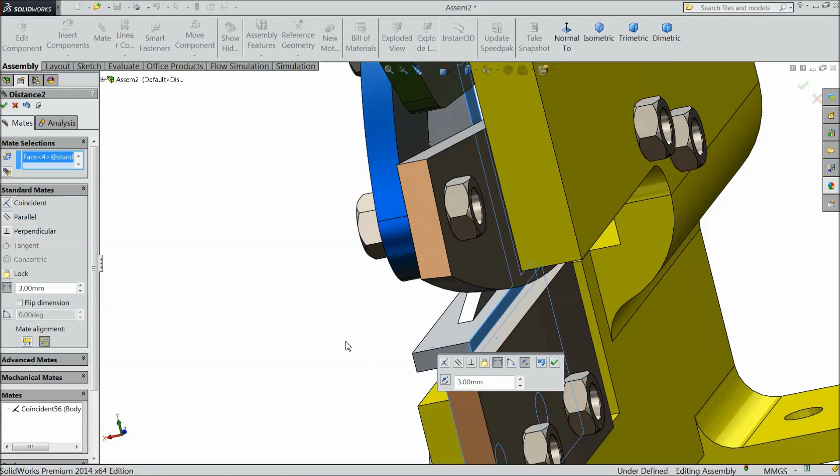Select this face and this face, mate, this face. Choose OK. Select this face and this face, make gap 3 mm. Choose OK, select OK.

Now this is the guide for this nut and bolt. So just browse our bolt. Now choose mate, select this face and select this, make reverse. OK. Select this face and this face. Select OK.

Now our assembly is ready. This bolt is quite smaller one, but we can change as per our requirement. So this is our shearing blade or guillotine blade. I hope you enjoyed this blade and everything.